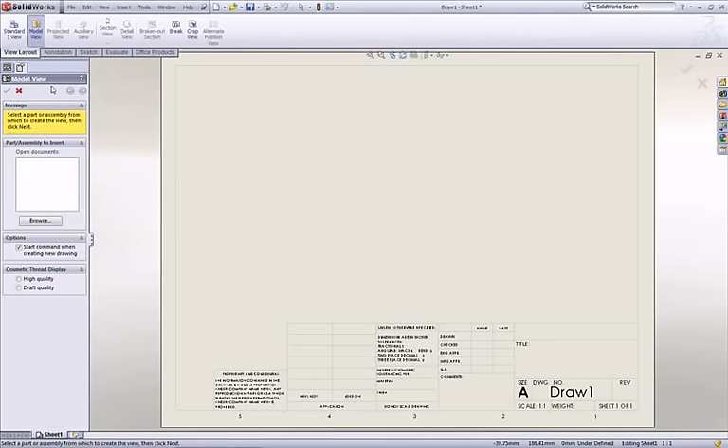Notice that the Model View Property Manager appears when the template opens. This is where you specify the part used in the drawing. Close the Model View Property Manager for now. You'll add the part later.

As mentioned earlier, this drawing template is configured to the ANSI standard, which specifies elements like the page size as well as format and content of the title block. You can customize these aspects of your drawing to follow your company's guidelines if needed. You'll learn how to do this in the next portion of the video.

If you use a sheet with a customized title block or page size, you can save that template and reuse it for all of your drawings. For example, if your company specifies that you must create drawings to fit a certain page size, you can create a template with that page size. Do this by right-clicking the drawing and selecting Properties.

For example, if your template needs to be on a page size 291 mm by 195 mm, click Custom Sheet Size and type the dimensions. You can now save this template and reuse it later. Open the File drop-down menu and click Save Sheet Format. Name your template and click Save.

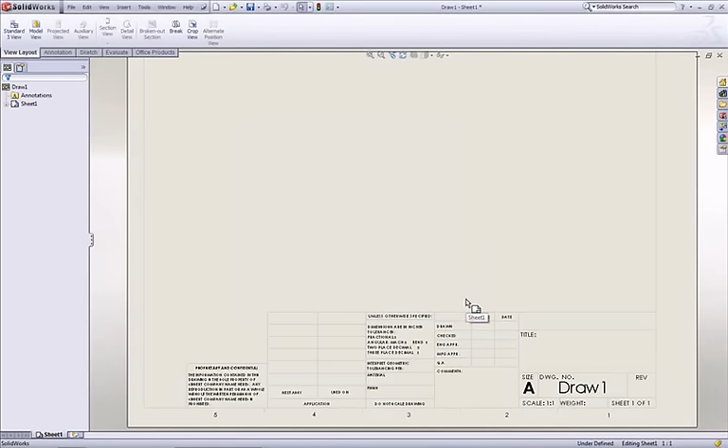Right-click anywhere on the drawing and select Properties. Your newly created custom template appears in the list of standard sheet sizes. Return to the A Landscape drawing template for now.

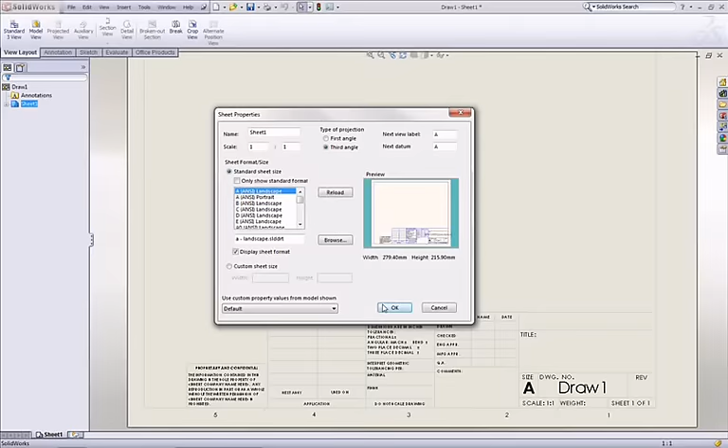Before importing the 3D part you wish to convert into a drawing, you must select the type of projection. A projection is the way three-dimensional objects are represented in 2 dimensions on your drawing. There are 2 types of projection: first-angle projection and third-angle projection. The ISO standard uses first-angle projection, and the ANSI standard uses third-angle projection.

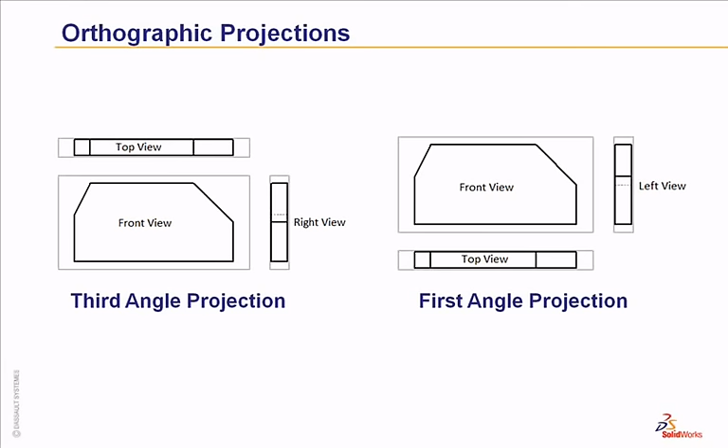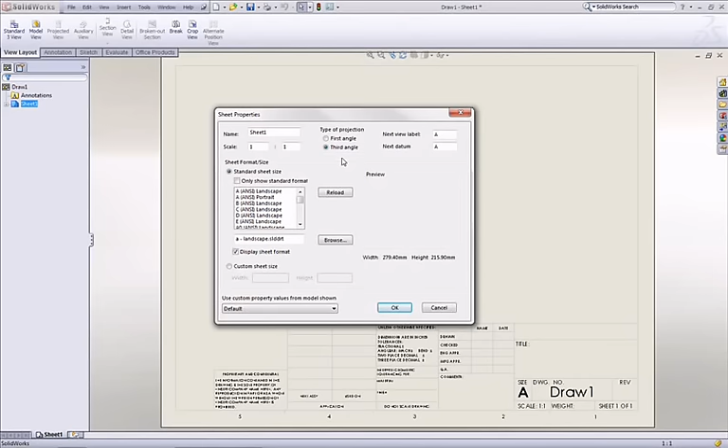The difference between the two is the arrangement of the different views on the drawing. Third-angle projection arranges the views like this on the drawing, while the first-angle projection arranges the views like this. To select the desired projection, right-click anywhere on the drawing and select Properties. Select third-angle projection since the ANSI standard is being used.

Before starting your drawing, make sure you've selected the correct overall standard. Click Options under the Document Properties tab. Select ANSI as the overall drafting standard. Now you're ready to create the drawing from a 3D part.

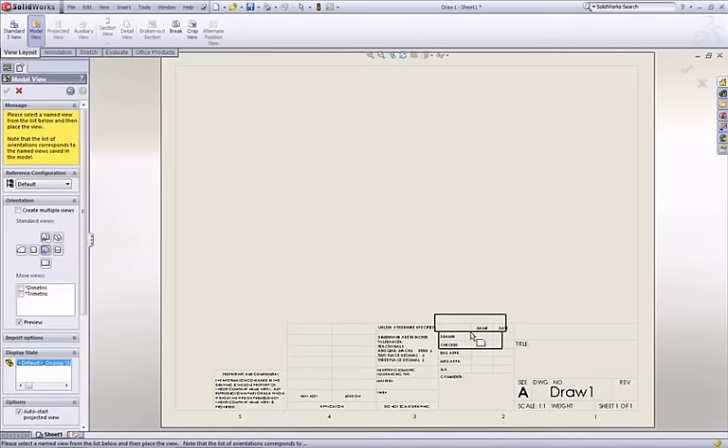Click Model View under the View Layout tab. Click Browse and navigate to the provided part called Cap Internal. Under Orientation, make sure Front is selected and that Preview is checked off. Under Options, select Auto Start Projected View. Finally, under Scale, click Use Custom Scale and select 1 to 2.

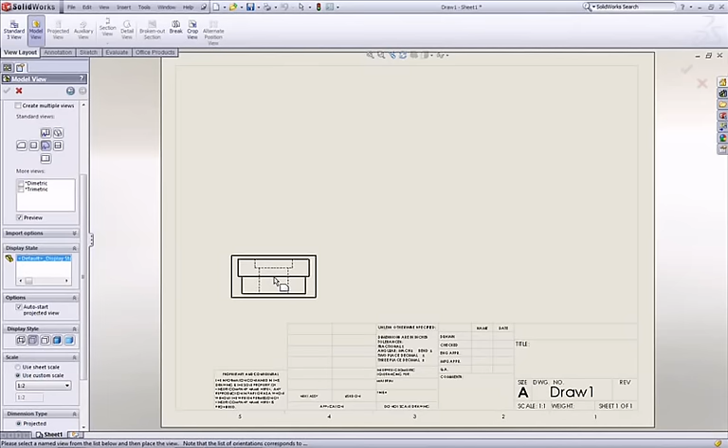Now move the pointer to the drawing and notice the preview of the front view. To show as much detail as possible from this view, select Hidden Lines Visible from the Property Manager under Display Style. Click to place this view as shown. Move the cursor up to preview the top view and click to place it as shown.

Next, you'll place the isometric view. This view should be shaded, so click Shaded with Edges and place the view as shown. Click the green check mark once all the views have been placed.

You should now add the center line to the front view of the cap internal. Do this by selecting Center Line from the Annotation tab. Now, click on the view to apply the center line. Click the green check mark once you're done.

You can move any of the drawing views on your drawing by simply dragging them. However, the views will only move in certain directions. For example, if you were to move top view, it can only move up and down. This is because top view is linked to front view, and to preserve the alignment, it only moves vertically. Click and drag front view. Notice that the top view moves along with it to maintain the alignment.

Since the purpose of a drawing is to convey enough information so that a part can be manufactured, it needs to contain dimensions. In the Annotations tab, click Model Items. This opens the Model Items Property Manager. This is where you select which dimensions, reference geometry, and annotations are to be imported from the model.

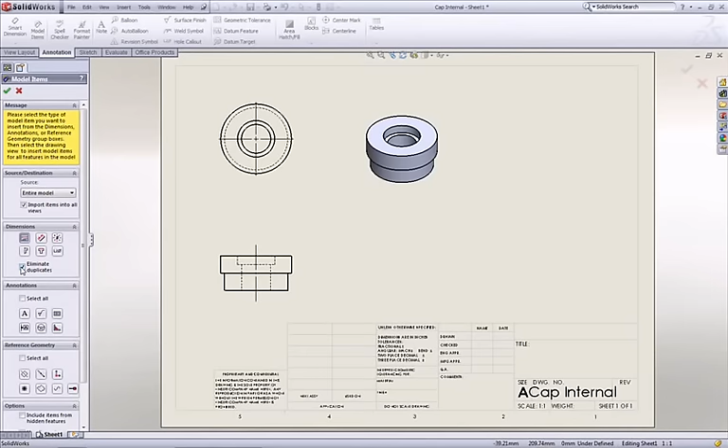Under Source Destination, select Entire Model to import all the dimensions. Select Import Items into all views as well. Under Dimensions, click Marked for Drawing. Select Eliminate Duplicates to avoid replicated labels. Click the green check mark to insert the dimensions.

To comply with drawing standards and reduce clutter, you need to rearrange the dimension labels on the top view. Click Hole Callout under the Annotation tab. Select the middle circle and place the callout. This annotation labels two diameters in a concise manner. Click the green check mark. Now you can delete the repeated dimensions by selecting them and pressing Delete.

You should also move the 80 mm diameter from the top view to the side view to comply with proper drawing practices. Select the 80 mm label, hold down the Control key on your keyboard, and drag the label down to the side view. Correct the location of the dimension label. You can now delete the label from the top view to avoid redundancy. Select the label and press Delete on your keyboard.

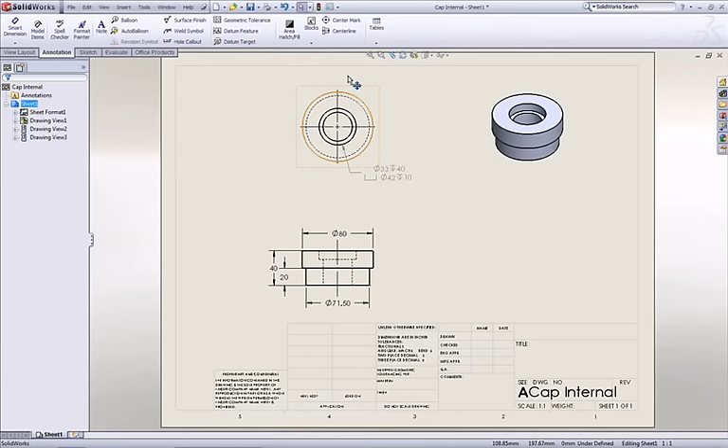Since the views are now configured, rearrange the views on the sheet. You should take this opportunity to save now that you've completed your first drawing in SOLIDWORKS.

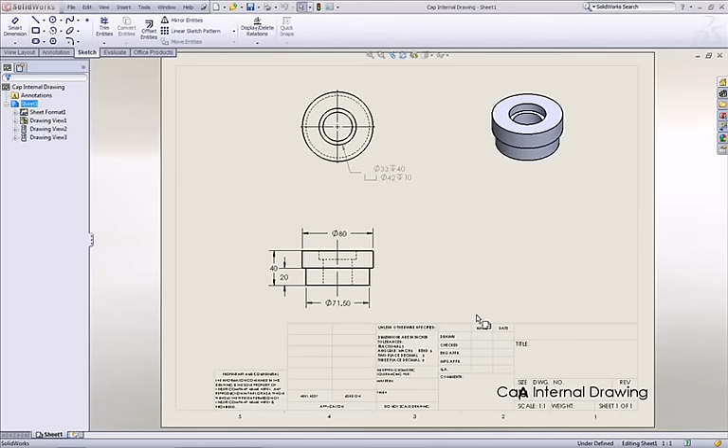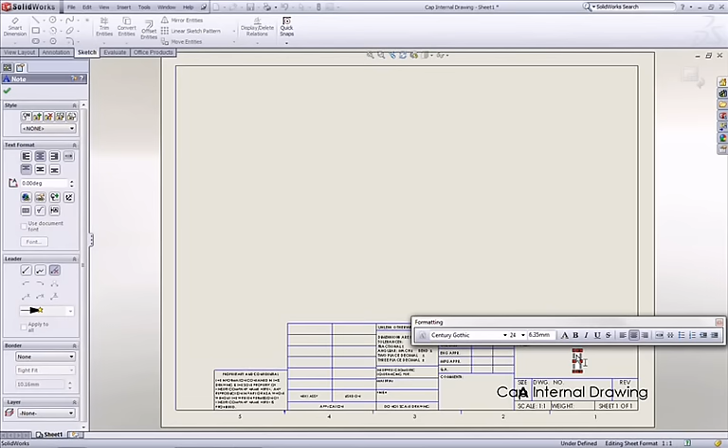Next, you'll be updating the title block of your drawing. Right-click on the drawing area and select Edit Sheet Format. Double-click the cell on the top right and enter your company's name. Repeat this process to enter the title of your drawing. Resize the name of your drawing if needed.

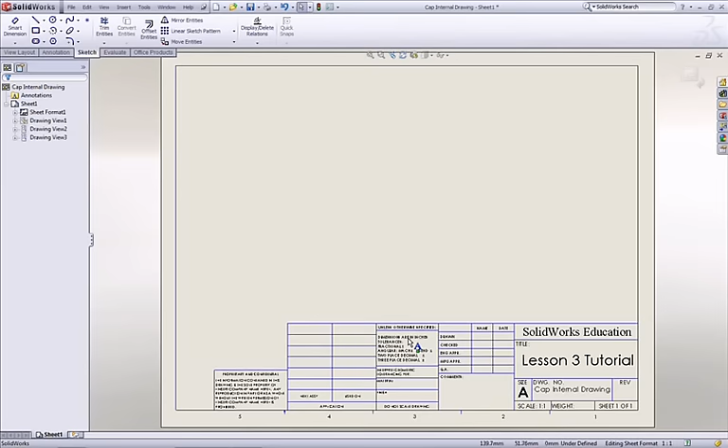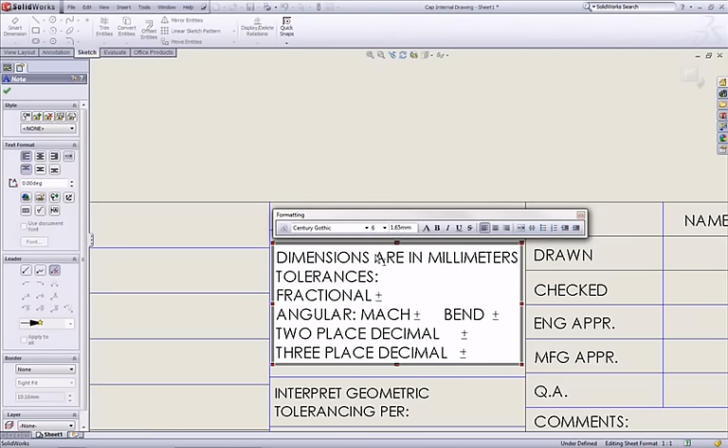In this cell, it says the dimensions are in inches unless otherwise specified. Since this drawing only uses millimeters, this needs to be edited. Double-click this box and replace inches with millimeters. You should also specify any tolerances here, if needed. Right-click on the drawing area and select Edit Sheet to exit the editing mode.

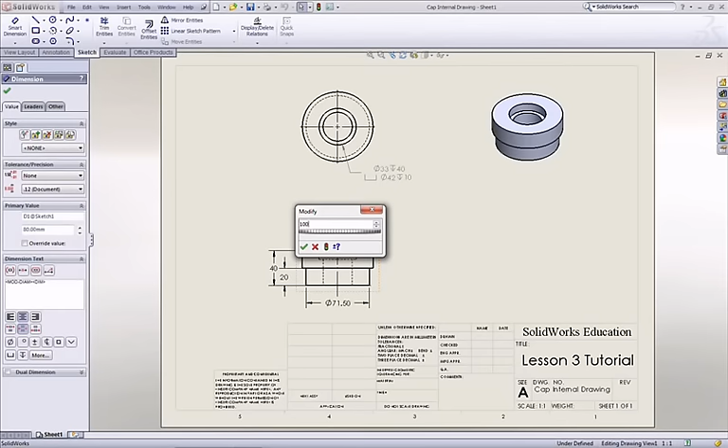If you change the dimensions of the model in this drawing, the 3D part associated with that drawing is automatically updated to reflect the change and vice versa. To see this, modify the outer diameter label on the front view. Double-click the dimension and notice that the Modify window appears. Change this value to 100 millimeters and click the green check mark. Click Rebuild to see the change. Not only has this dimension been changed on this drawing, it has also been changed on the part.

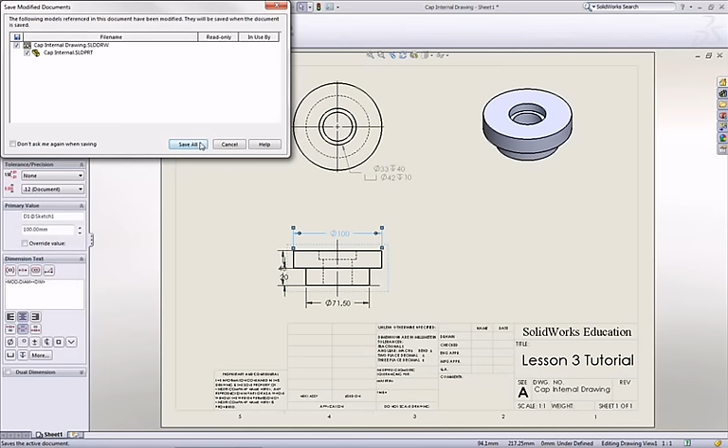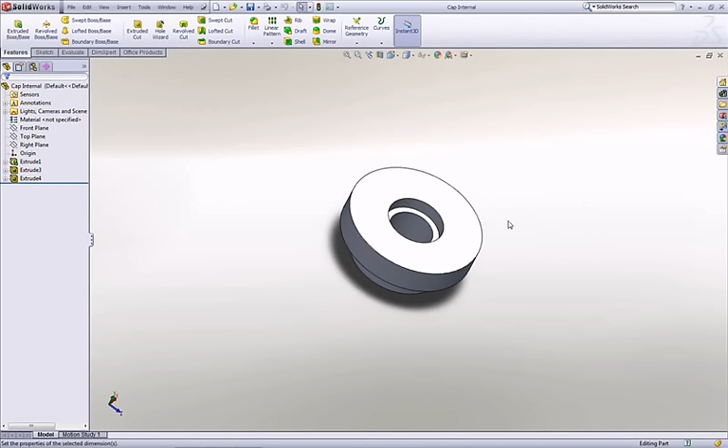Save the drawing. SOLIDWORKS notifies you that the model referenced in the drawing has been modified and asks you to confirm the save. Click Save All to save the changes to the part as well. Now open the part to verify that its dimensions were updated. Double-click this face and notice that the diameter of the outer circle has in fact changed to 100 millimeters. If this part belongs to an assembly, the new dimensions have also taken effect there.

In this section, you created your first part drawing. You first configured your sheet and then imported a three-dimensional part. You selected a projection, added dimensions, and learned how to modify the title block. Finally, you learned that modifying a drawing's dimensions can automatically modify the dimensions of the three-dimensional model that was used to create the drawing.